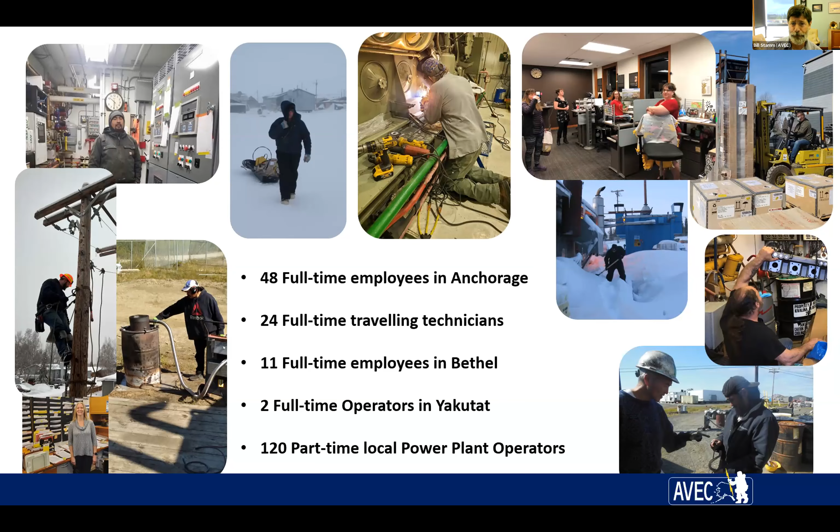Everything that we do, everything that we build, we typically have to fly in or barge in. There's not a variety of hardware stores to go out and buy more parts and pieces. There's no electric supply or electronic supply stores that you can purchase things from. So everything you do, you better make sure that you've made a list and checked it twice before you go out there to build something.

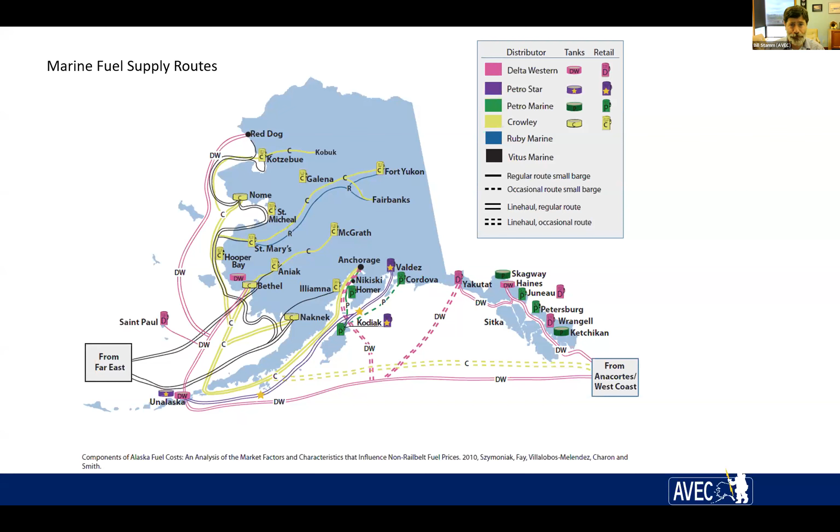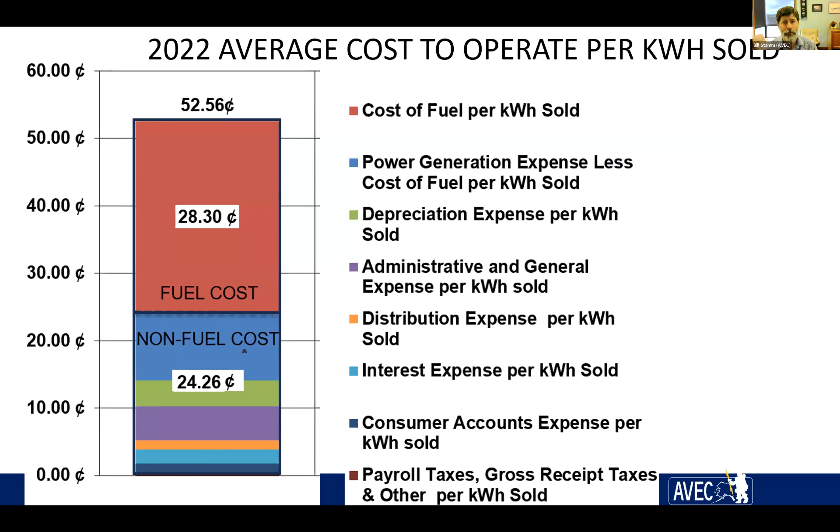In Bethel, where the economies of scale are quite a bit better, it's probably in the 30 cent per kilowatt hour range prior to PCE. But if you throw all of our costs and all of our sales into one bucket, our average cost per kilowatt hour last year was about 52 cents a kilowatt hour. As you can see, more than half of that cost is just to buy the fuel to get it into our tanks.

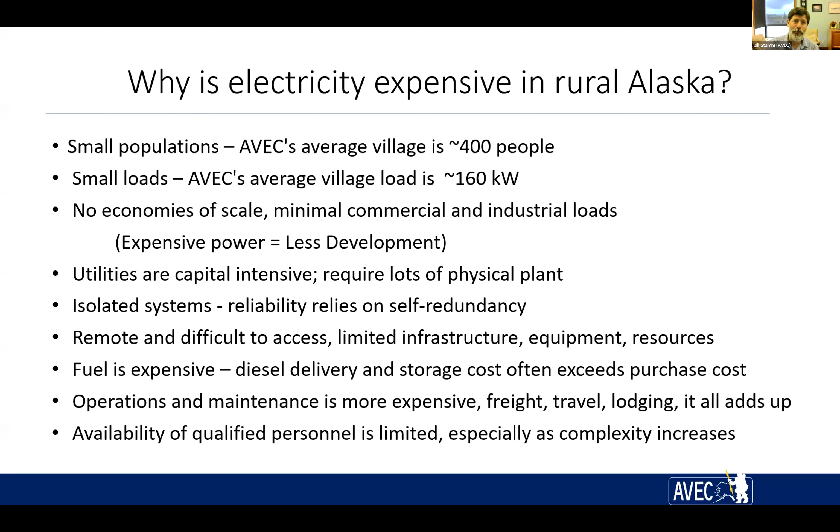And as the complexity of our systems gets more, the availability of people that will operate and maintain those systems becomes less and less. Some of the things we do to maintain or improve on that: we always take every opportunity to improve on our generation efficiency. I see I'm coming up on my half hour, so I'll buzz through this. Minimize distribution losses, try to tie communities together while we can. We welcome new facilities or new communities if they're cost effective.

There have been very difficult hardship cases where we look at it and there's no way for AVEC to have communities join the AVEC family without putting an undue burden on the communities that have been part of AVEC forever. There have been communities that have joined or that receive grant funding to upgrade facilities, and then AVEC's more than willing to take on the responsibility of continued maintenance.

But many times the facilities as they stand would require way too much work and way too much capital investment from AVEC when we still have a lot of capital investment to make in the communities that have been part of the family for a long time. We do anything we can to maximize the use of the diesel fuel. So we capture and sell recovered heat. We do have some facilities for excess wind energy that we are sending out to water and sewer facilities, and continue to promote energy education, workforce development, and economic opportunity in all of our communities.

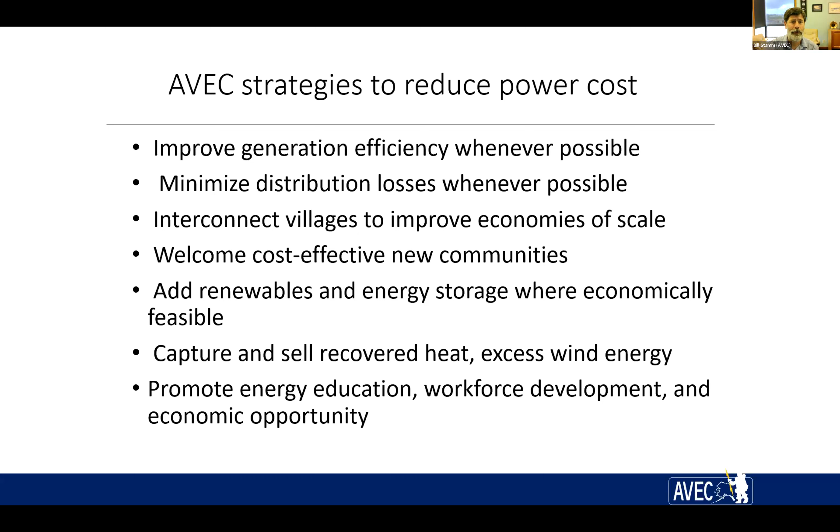Just want to highlight a project that is still yet coming to fruition. I hope I could have told you that the energy storage system was on its way, but as I mentioned earlier, that's still in Fairbanks and testing. The community of St. Mary's used to supply power as far as Pitkas Point and the St. Mary's Airport. A few years ago, we were successful in building a tie line over to Mountain Village. It's about a 20-mile tie line. And we installed a 900 kW wind turbine.

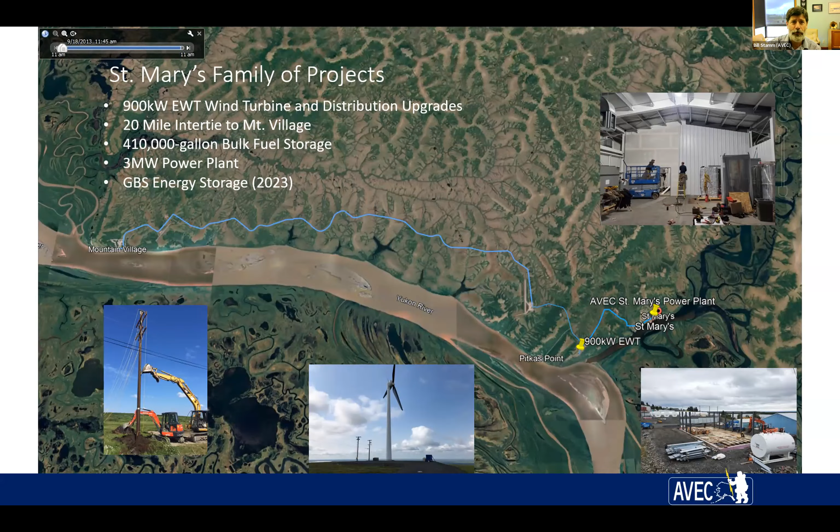In the last year, we were able to displace 35%, I think, of the diesel fuel for all of those communities with wind. It is a large 900 kW turbine that is serving an average load of about 600 kW. So there, with the energy storage, we're hopeful that we're going to be able to, one, cross the 50% threshold, and also expand the beneficial electrification that might be able to be used for excess wind. That's it. That's my presentation.

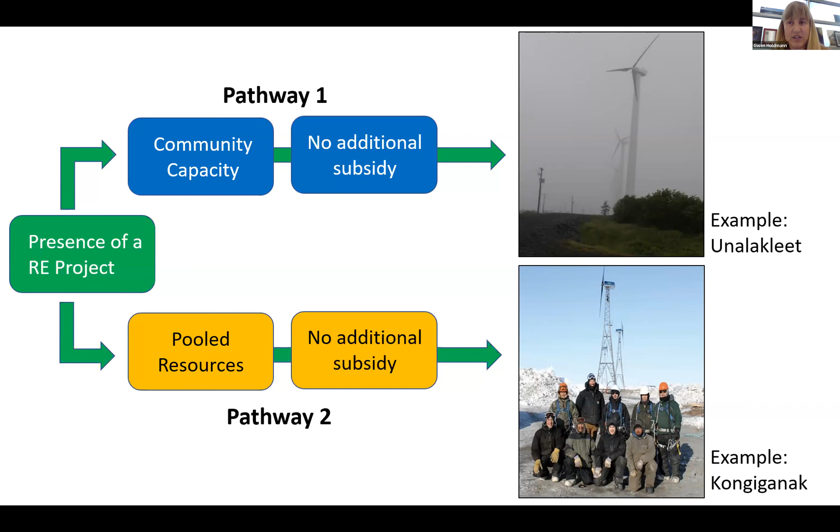So with that being said, I was really interested in AVEC because that's one of the main ways in which we're pooling resources across multiple communities, and seeing across a number of different variables how it compares to independents in the same region, taking account of variation in size and distance from the coast that would also impact, for example, fuel costs or the delivery of fuel.

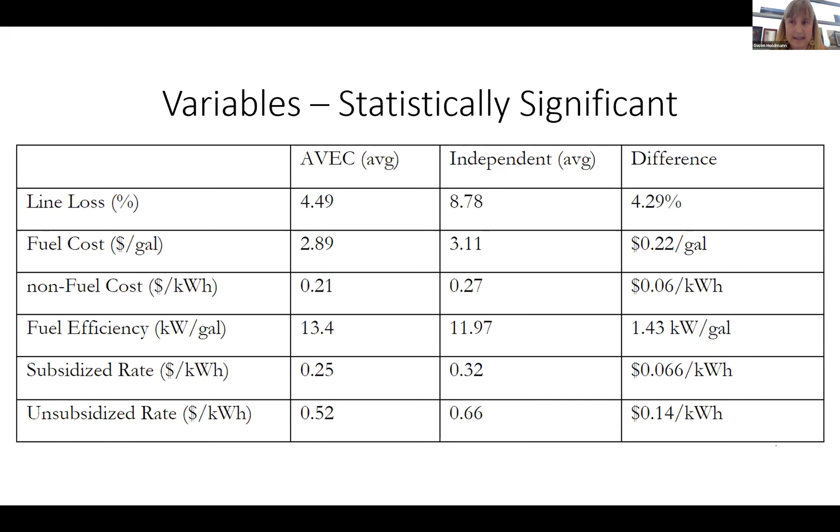And then going back to the difference between the subsidized and unsubsidized rates. Not all kilowatt hour sales qualify for the PCE program, so that unsubsidized rate difference can make a really big difference for these communities. Looking at the kilowatt hour sales across all of these communities, the AVEC communities are paying in total about $100,000. And again, these are really rough numbers, but there generally is a trend where there's quite a bit of higher efficiencies with AVEC communities, correcting for size and distance from the coast and those sorts of things. So I just wanted to point that out.

If people are interested in that, because I don't want to spend a lot of time on this, I want to pass this off to Connie and address any questions. But there's a couple of publications that are out there right now. The second one in particular, this critical pathways, is where some of the data I just shared comes from. We can drop that in the chat. They're both available for free online as publications.

And then there's these 3 publications that I'm working on right now that should be published within the next month or so. One is just a case history of AVEC. The second one is this quantitative analysis of AVEC's performance that I've been presenting on, a little bit of an advanced snapshot. And this third one is really this Goldilocks zone of size of utilities for remote communities, balancing local control, which a lot of folks really want to maintain, and that's understandable, with economies of scale across numerous different communities. So I've been trying to find where that optimal zone is for communities in terms of pooling resources versus maintaining local control. So those might be of interest.

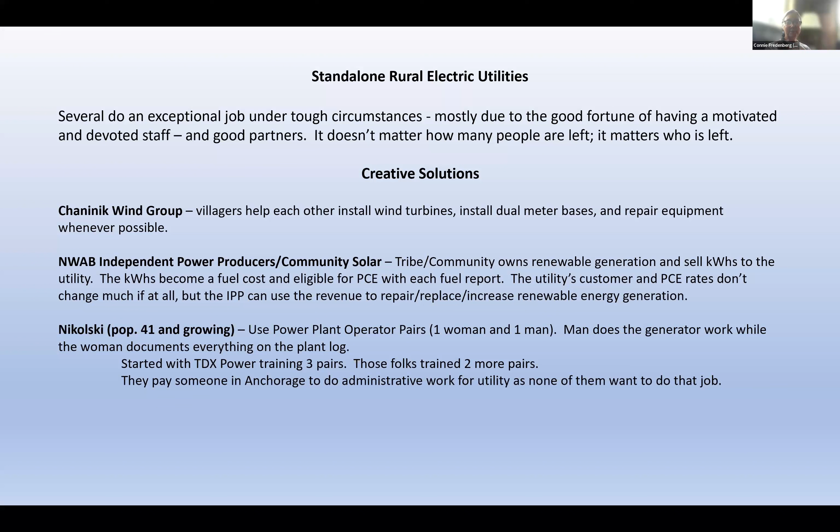And I just had to throw this in there because, like I said, the depreciation is one issue with PCE, but another one is it just directly butts heads with renewable energy. And my example is Puvurnaq Power Company in Kongiganak. According to Rod Phillip, their manager, they have reduced the amount of imported diesel fuel for that community for both heat and power by 50%.

That's huge. And when doing their annual report, I help them. They do it mostly themselves, but I help them, and I review things for them. But I asked the RCA when they reviewed the report to count those excess wind kilowatt hours when they calculate line loss, but not to count them when they calculate the PCE rate, because that causes the expenses to be divided by a larger number, which doesn't seem quite fair.

It reduces the PCE rate unfairly because they're selling that heat kilowatt hours for 10 cents. And that's just not much. Their regular rate is 65 cents. So I think it unfairly reduced their PCE rate. And on top of that, they take the revenue from the sale of those heat kilowatt hours and subtract it from expenses, further reducing the PCE rate.

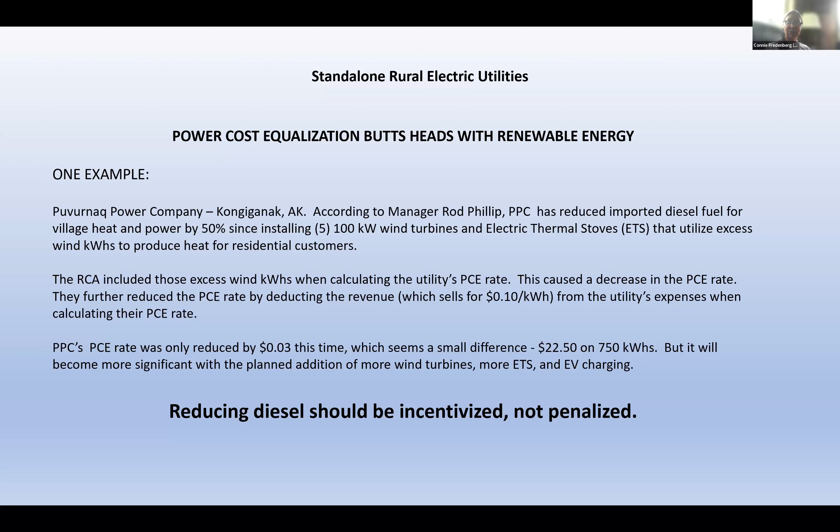Thank you, Connie. I really appreciate that. And I appreciate that point that you made about Kongiganak, and I'm sure we'll hear a little bit more from Dennis on that as well. But that $22.50 that you mentioned, that's on a monthly bill for somebody using 750 kilowatt hours, which is kind of the maximum threshold allowable for PCE right now.

But if you look at that over a year, I calculate it's like $270 a household at that threshold again. And for the community overall, I'm just doing very back of the envelope numbers, that'd be more like $40,000. So that really starts to add up and be pretty significant. And I don't think that the PCE program was really designed when we were thinking about wind to heat or some of these other really innovative approaches.

And so that idea of rethinking how it's applied, because we do want to incentivize the reduction of diesel fuel consumption for both electric power but also for heat, is something that maybe the rural subcommittee could really be looking at as part of this task force. Does that sound fair to you?

Yes. Hey, and I also wanted to point out one other thing. We were talking about community facilities. There's also a backlog of approving community facilities at AEA. And I've worked with several utilities that put in applications for community facilities years ago that have yet to be approved. And I guess AVEC's better at writing them. I'm not sure how they get all of theirs approved when we've had some serious issues with that.

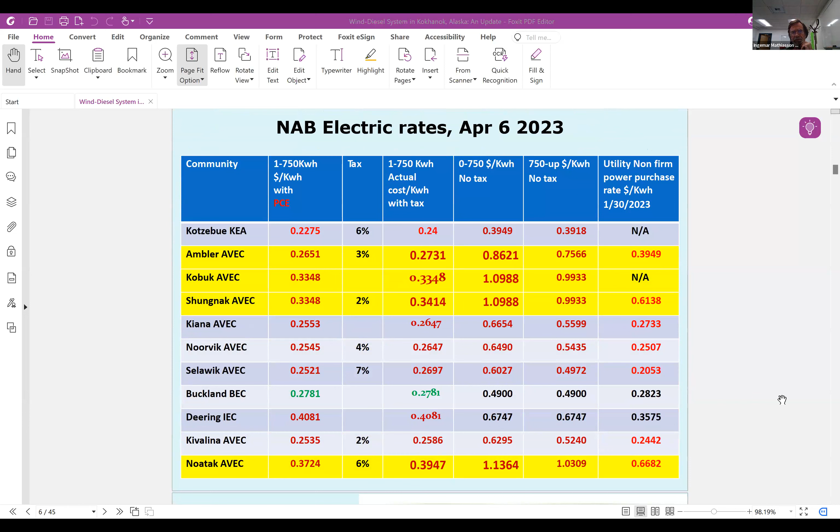I'm also including here the utility non-firm power purchase rates for a discussion further down in the slide stack for how we operate as an IPP up in the region. Next one. So we started our energy plan in 2008. You can go to the next one. And it's been running now for 15 years. And we meet two times a year to make sure that we are on track with our energy plan with all the 11 communities. Next one.

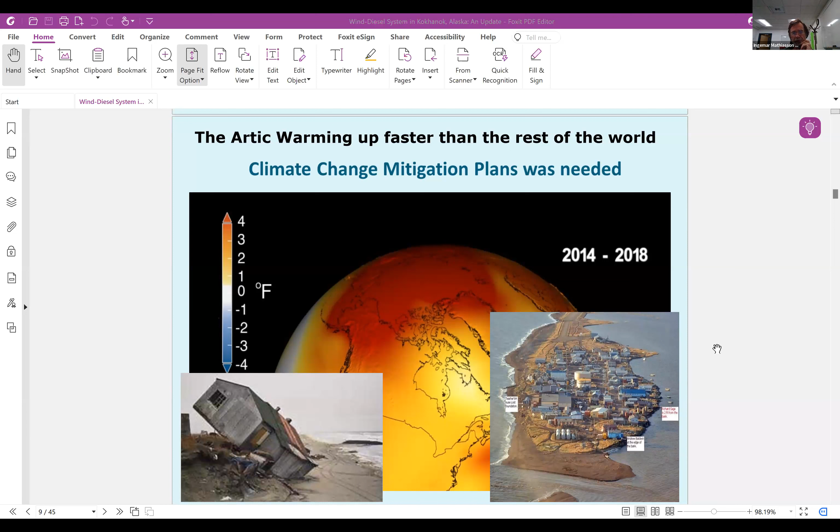In 2014 to 2018, something more was added into the picture, as you know, and that's the climate change mitigation plan, as we are now starting to erode and have other problems, including the carbon problem. Next one.

So we changed our statement just slightly, that we weren't just doing renewable resources because of replacing the diesel fuel, but also to combat climate change and the CO2 increases, methane and so on and so forth. The 10% decrease of imported fuels by 2020 actually has been changed a little bit to 2025. 25% is what we're aiming for by 2030, and maybe 50 by 2050. Next one.

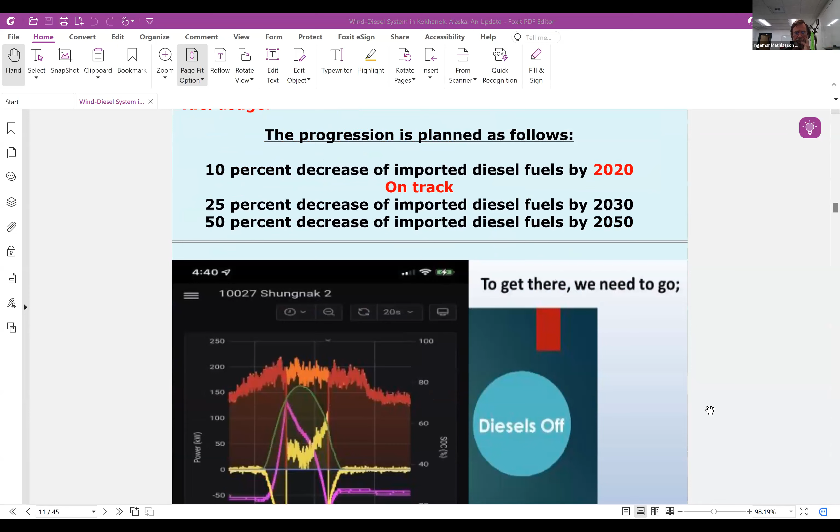And to do that, of course, we need to try to get diesel off when it comes to electricity. This is a snapshot from Shungnak diesel-off last year when we started to turn it on. Next one. So our single focus back in 2008 to 2012 was to try to stabilize the cost of electricity, developing the local resources as much as possible, wind, hydro, and possibly bring down the cost per kilowatt hour. And the projects were funded and implemented by the electric utilities to offset the use of the diesel fuel.

However, the cost to the households per kilowatt hour did not change much in the communities that receive PCE funding. The funding balances out against the Railbelt, and basically all of Alaska ends up in the same configuration, right around 20-24 cents per kilowatt hour, balancing against each other.

As you may know, it's been in the discussion, the natural gas in the Cook Inlet is changing the picture, and if the cost goes up for the Railbelt utilities, and that starts climbing to 30 cents per kilowatt hour, the rural communities will get less PCE and will climb up to the same status at 30 cents or higher. We're all balancing on that PCE formula back and forth. So what happened, of course, as we built more and more alternate energy projects, like Connie mentioned, the PCE then decreased to the communities. Next one.

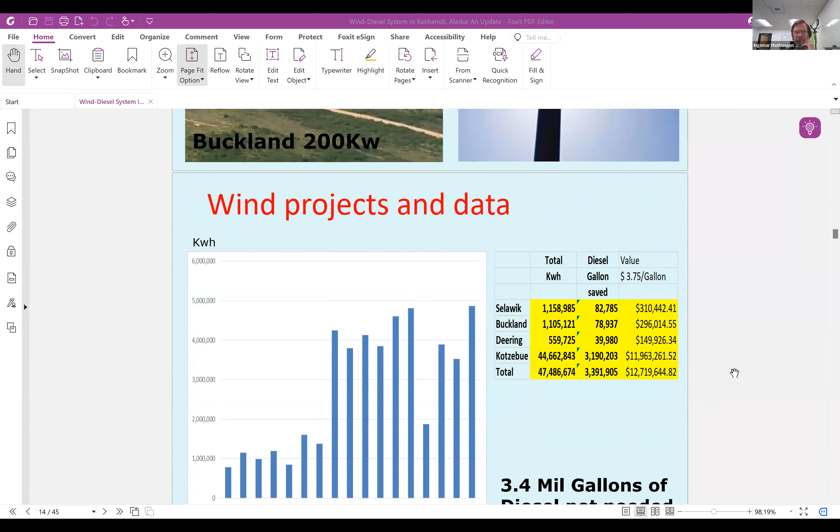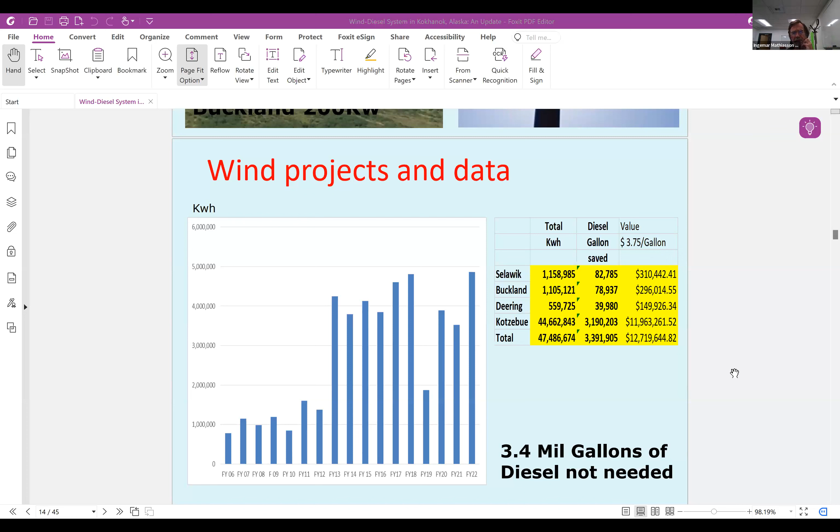The wind project has done well. The Kotzebue projects are included here, and 3.4 million gallons have not been needed over the years since it's been implemented. It has been a success, of course. Kotzebue Electric up there was one of the forerunners in the state. Next one. And the first independent power producer showed up in 2012. Very familiar, I'm sure, with Fire Island. Just making a point here that in 2012, the first independent power producer actually showed up in the state. Next one.

2012 was also the year when we implemented the first solar arrays up in our region. In 2011, we had a test panel that showed that we had 11% capacity to do it. In 2012, we got a hold of a CIAP grant, Coastal Impact Assistance Program. And with that, we convinced DC that Alaska was indeed not dark. When they asked us how we were going to do solar to clean up the environment, we said, well, we're going to decrease the amount of fuel for our plants and lower the cost of operations. And that would create fewer spills, a cleaner environment, and better conditions.

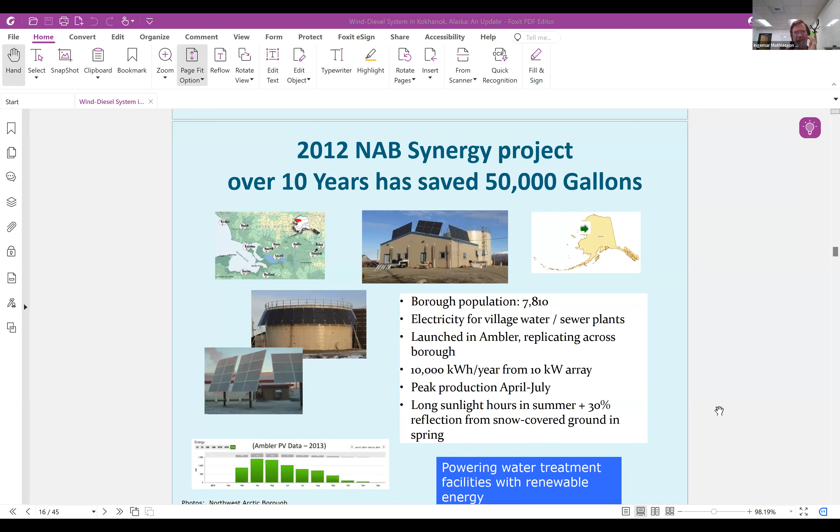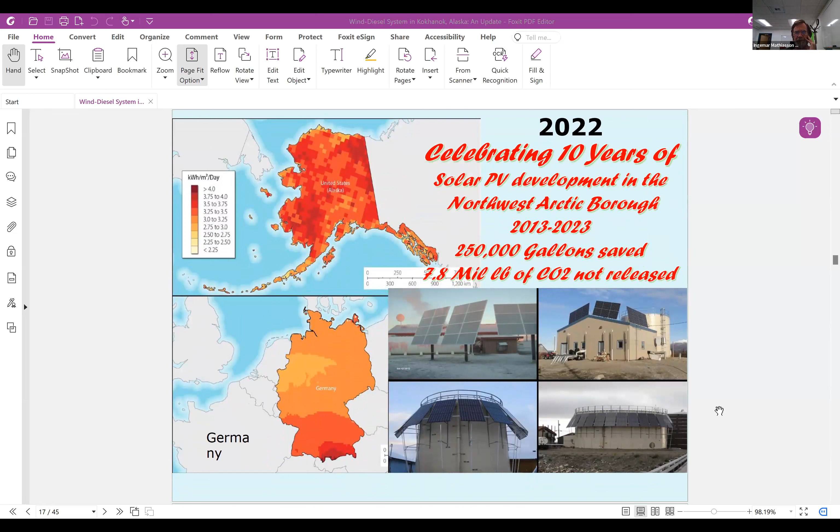And they go, well, it's dark in Alaska, isn't it? And I said, nope, it's not. And they eventually reluctantly allowed us to put all the solar arrays up. And since then, we have saved 50,000 gallons over 10 years. Next one. We have 10 years of continued solar development because of that, and 250,000 gallons now saved, 7.8 million pounds of CO2 not released. Next one.

So these are approximate minimum values per year of behind-the-meter solar projects at the water plants. These are not visible to AVEC or to any of the utilities. They are behind the meters, and their value balances exactly against what the PCE subsidized rate would have produced. And those are the numbers right there. Basically 30,000 plus in savings per year for the water plants of the region. Next one.

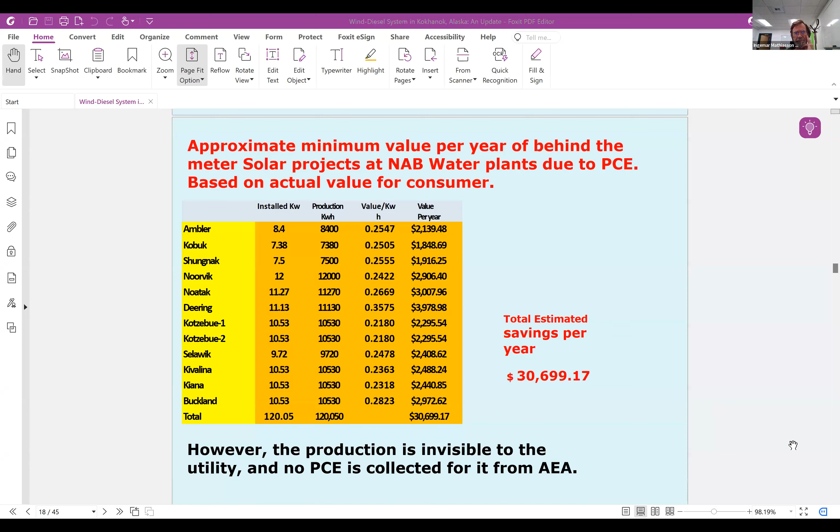So here comes the interesting one. If you look at the top one there, if the Shungnak utility project at 233 kilowatts was actually put on the households, the value would have been $51,100 per year. As an IPP, its value is 112,000. So it was actually better to implement in this utility, in this community, the solar array.

This is a value for the households, right? As the households actually own the IPP in Shungnak, they make the 112,000. If they had put the solar arrays on their houses and then behind the meter, the value would have been only 51,000, because of the difference between the avoided diesel rate and the actual PCE rate that is the result of it.

If you look at Noorvik, it's actually the other way around. In Noorvik, the avoided rate is 16 to 17 cents, and the PCE rate is higher, so it's more valuable on the households in Noorvik than it is as a utility IPP array. I'm just making a point here that this has to do with how the PCE is calculated, right?

It offsets the same amount of diesel fuel whether the solar array is behind the meter on the households or with the utility, doesn't matter. It's the same amount of diesel fuel that is offset, but the actual value to the community is different. If you look at Kotzebue's 966 kilowatt array now, with a production of 920 megawatt hours per year, behind the meter value is 220,000, and its value as an IPP would have been 165.6.

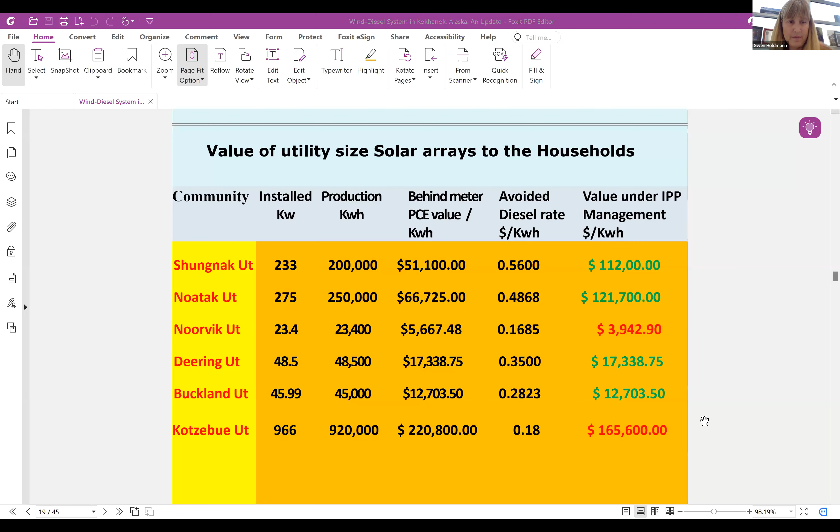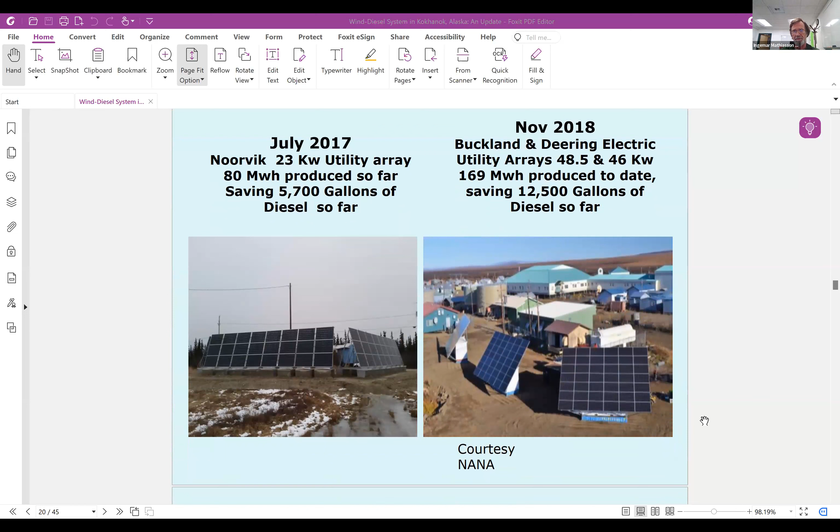Next one. So in 2017, we did a 23 kilowatt array in Noorvik, and Buckland and Deering got their first solar arrays. Next one. And in 2020, Kotzebue built their first solar array, together with the Shungnak one that was completed in 2021. And Kotzebue has now advanced theirs from 630 to 966 kilowatts this year. And the difference here is interesting.

You'll see in a minute here that on the one hand, of course, Kotzebue wants to go to diesel-off. Shungnak has operated diesel-off together with the partner AVEC, and produced 818 hours of diesel-off operation last year. There are things that we are still working out with the project, and it's not easy to just integrate it.

All the utilities need to be upgraded to microgrid status, and in many cases that takes quite a bit of money, up towards $1 million needs to be advanced to utilities that want to do renewables effectively. And that money has to come from somewhere. And it's hard to justify that in the grant requests we do to the Department of Energy or USDA or the state. Next one.

So why do we develop them? The communities can take control of their own energy future, developing the local resources. This creates buy-in and good relationship with utility, and they can sustain the PCE support to the community and stabilize the energy cost. Better economics, circular economy, funding collected pays for further development and local workforce expertise. The money stays in the community instead of sending the money to far-off countries for oil.

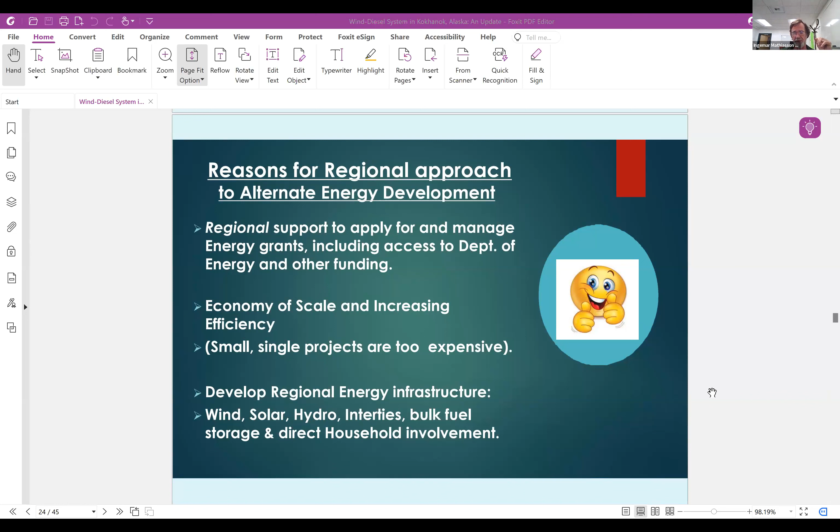So the reason for a regional approach to this. Well, regional support to apply and manage the big energy grants, including access to the Department of Energy and other funding. Economy of scale, we can increase the efficiency of making the project happen, because making a small project in a single village is more expensive. And we can then go for the regional energy infrastructure, like interties, in particular bulk fuel developments, which we are looking at right now, hydro projects and interties, and direct household involvement, which also is happening here. Next one.

The borough in this case is helping with administration for the independent power producers for PCE calculations, utility base and billing, job creation, workforce development and training, capacity building. So this is some of what boroughs should do anyway. So it fell right in our court to do some of it. And the region then speaks with one voice, can advocate on behalf of the PCE and the statewide energy policy that creates energy security. And it's needed to stop the increase in cost of energy and hedge against the fuel increases and supply disruption. So next one.

The Shungnak Solar IPP project. Okay, so Shungnak is 223 kilowatts. It uses 550 panels. Blue Planet is what we decided to go with for environmentally friendly lithium iron phosphate batteries capable of holding both the communities of Shungnak and Kobuk. They are tied together with an intertie. So they can actually run on just the battery for 2 hours during the summer without generator or solar power. So we started in April '21, and completed the construction by September '21 at a cost of 2.36 million, funded by USDA and our local VIF and rural funds at another million. Next one.

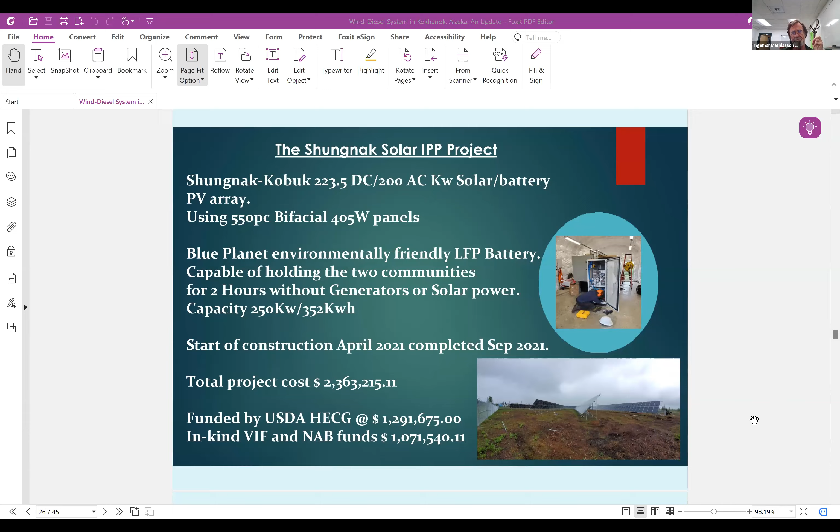And of course, we got 2 awards. We got the Project of the Year award in '21 and the Most Equitable Community Solar Array in the United States in 2022. A lot of fun. Okay, next one.

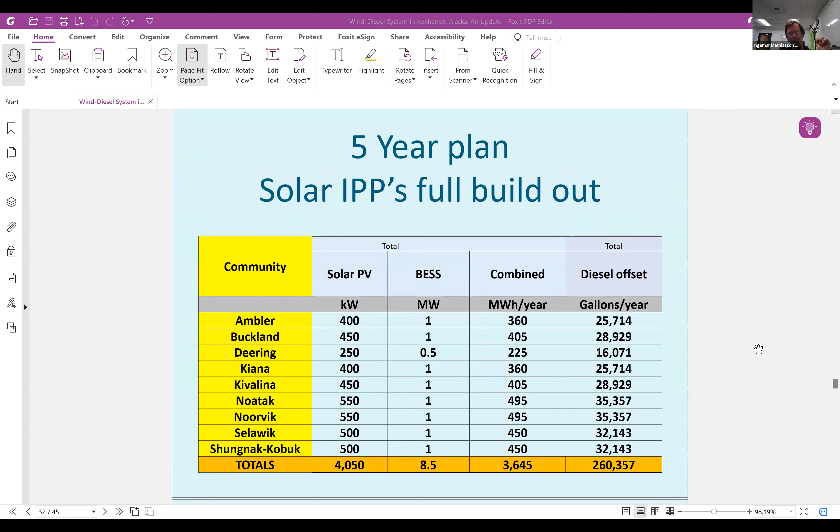So here's the build out. This is approximately what we need to get to the full build out of what we think we can put in every village without going overboard in the financial realms for maximum diesel offset per year. This is the rural communities, only the hub around Kotzebue. Kotzebue is not included here. So we can get to a point of 260,000 gallons offset per year and keep the PCE funds. The next one.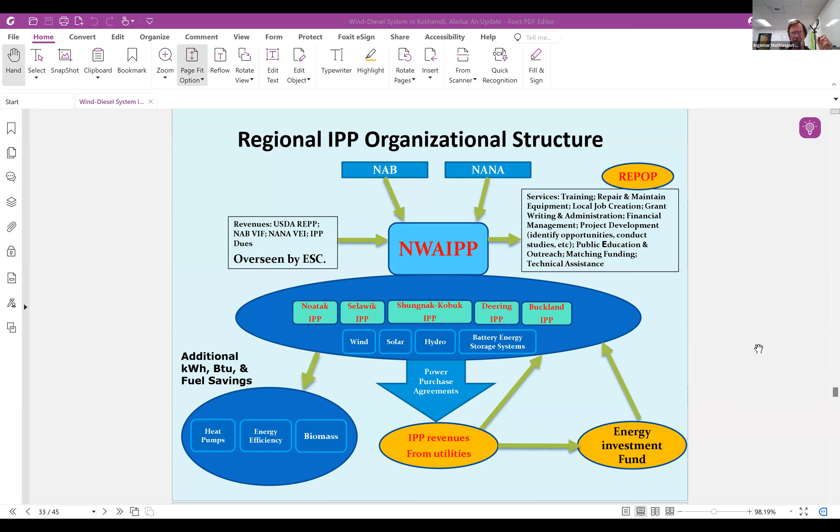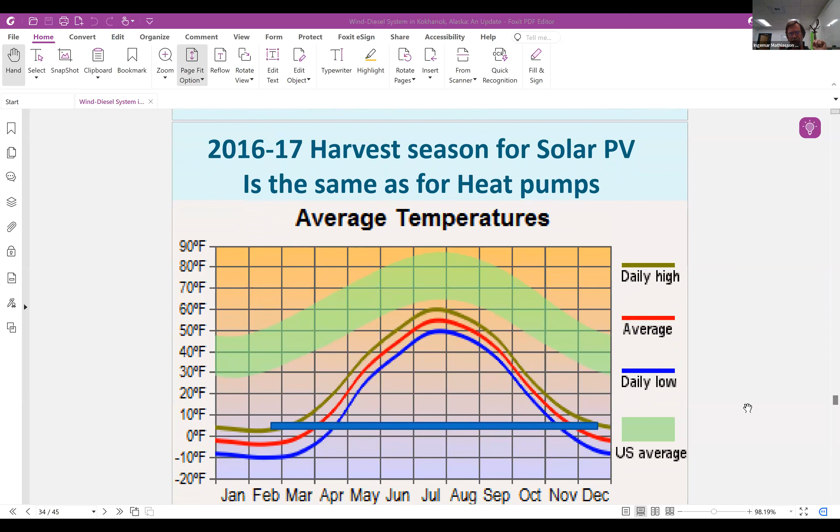We realize that as the complexity of these systems increases, we need to have faster and faster response, and to get internet fully developed in all the communities is pretty much a must to operate this microgrid system. Next one. And then I want to add on a little thing. That's the IPPs. And I just want to also add in that the solar PV has the same harvest season as heat pumps. The next one shows the same months of the year for Alaska that we have the sun, and we can also do heat pumps.

And this particular picture shows that if your COP on a heat pump... all of you probably know what a heat pump is at this point, mostly mini splits we're talking about here that can either heat or cool the house. There will be some pictures here in a bit. I wanted to just emphasize that this is the next step. After we electrify, we need to get after the heating fuel, right? And this is one way to do it with the heat pumps.

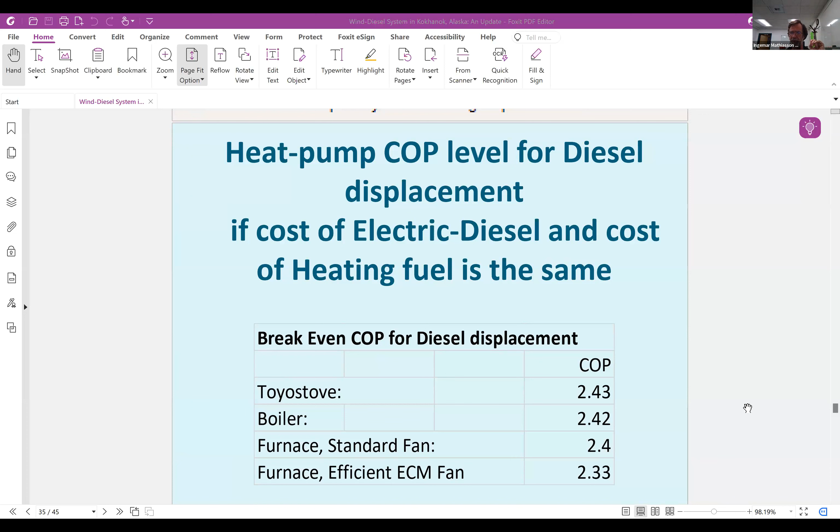Next one. This is what Maine did. This was 2017, they started this. They run heat pumps over in Maine down to -27 Fahrenheit. And we have seen some of the heat pumps in our region work well down to -40 and still function, depending on the size of it and survival. COP goes down to just 1, so it's the same as an electric heater, but they can save quite a bit. You'll see here in a minute. Next one.

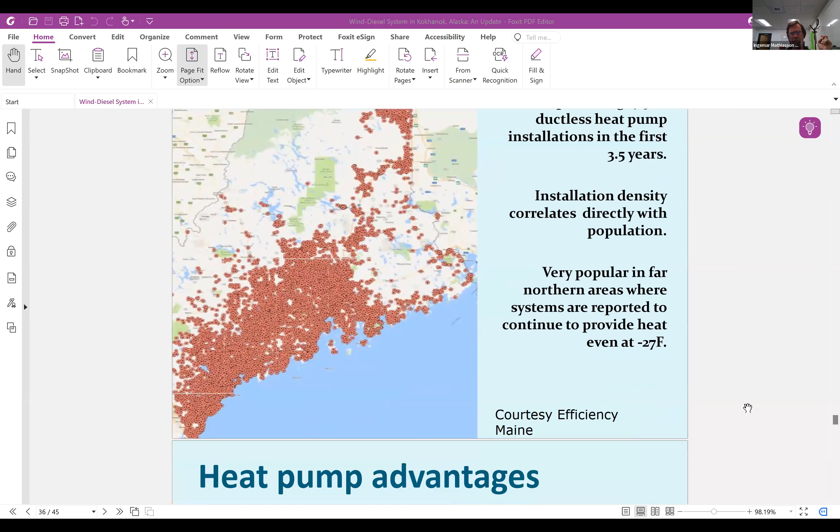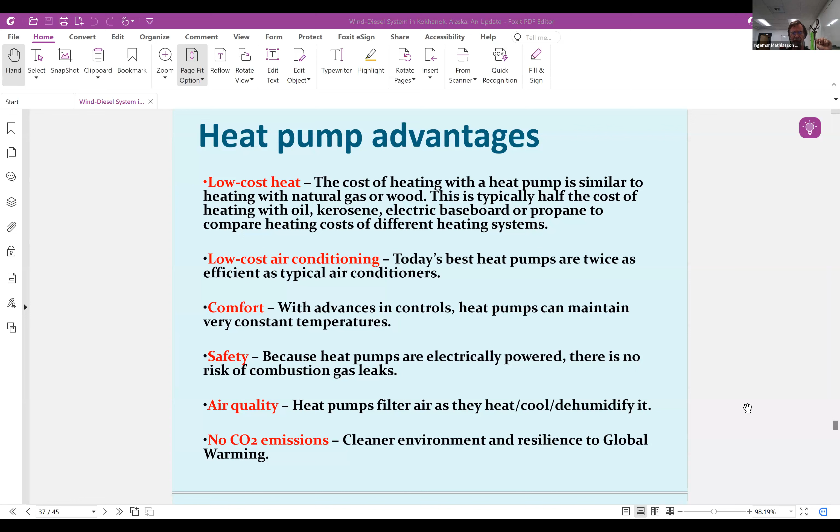The advantages are low cost heat, low cost air conditioning, comfort, safety, air quality, and no CO2 emissions, providing that you're operating off electricity from the renewable energy system, of course. If you are operating off the generators, then it would actually increase the amount of CO2 emissions, since you need more power to feed these pumps, since this is a new system that the communities didn't have before. Another way of heating or cooling the house. Next one.

We did 13 air-to-air heat pump installations in 2017 to 2018, and they are all functional at this point and doing well. They're Panasonics. They were oversized for the low temperature environment and have saved their communities a significant amount. You'll see in a bit here. Next one. I want to make sure we stick on time here real quick.

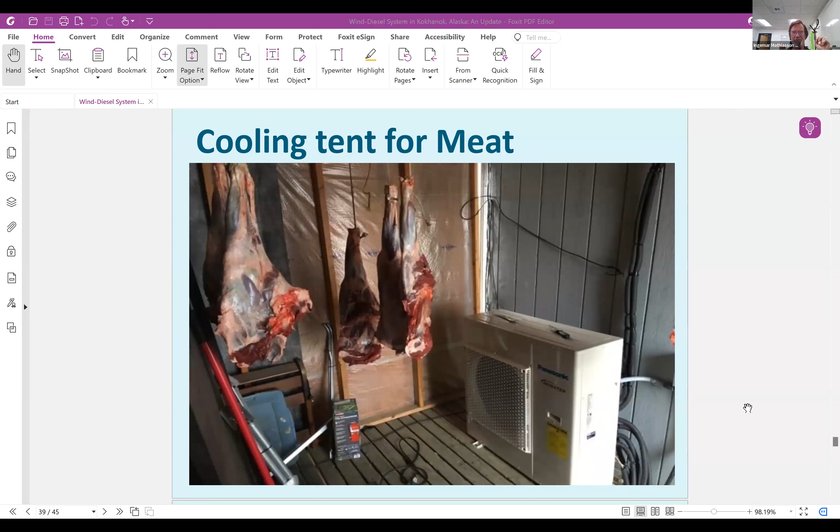One innovative approach was, one guy called me up after he got it installed, and this was in August, September. It was hot out, and he just got his meat. And he realized that if he put it in front of the heat pump, he could actually suck the heat out of the meat and put it in the house. So he ended up with a cooling tent right outside his house and saved the heat from that meat, saved the meat, and heated his house all at the same time. This picture went all around the world with Panasonic. Next one.

So here's the COP curve. You can see what months it actually is really functional, and it's the same curve as you have when the sun is up, obviously. You can see the green offsets.

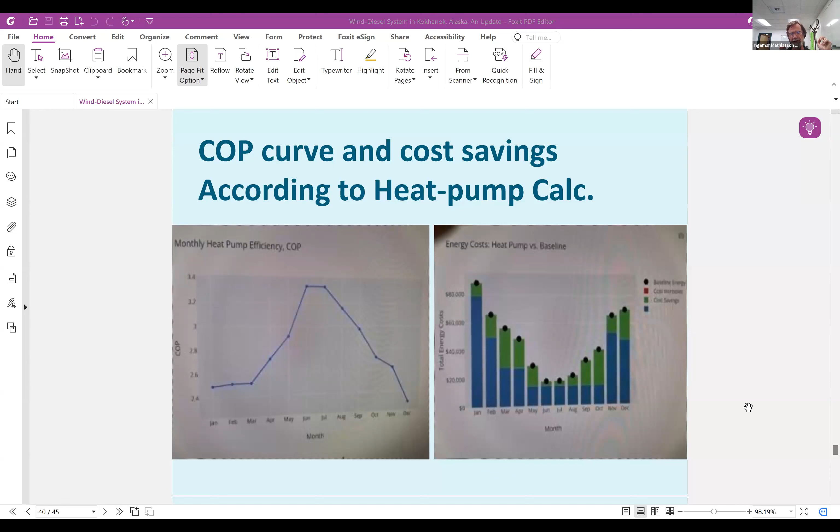That's at $12 fuel. We are now at $15 fuel in Ambler. So savings over 14 years, about $35,000. If somebody in Ambler has this unit, they're likely to save 40,000 or more over their lifespan. The heat pumps work. It's a matter of harvesting the energy when you have it.

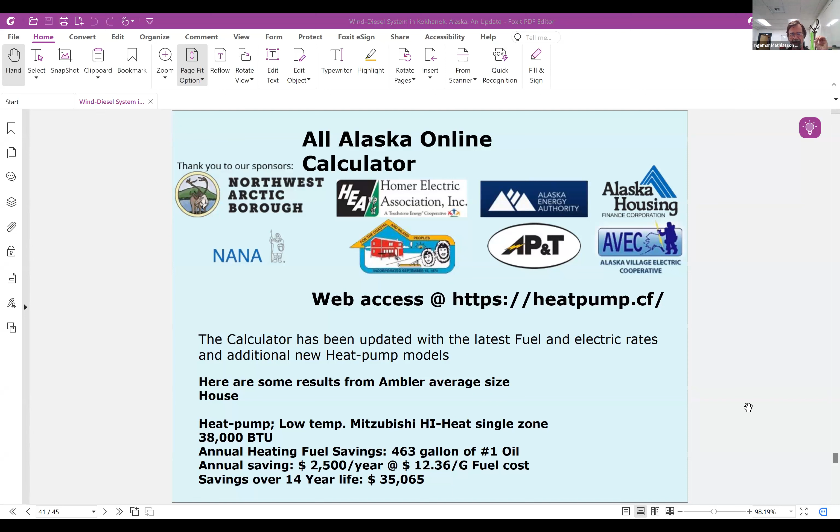In Alaska, we harvest when we have our resources, whether it's meat, fish, or whatever, and we'll harvest during the sunny season and in the summer for 6 months. There's significant savings if all households have heat pumps of various kinds. Next one.

So this is the pilot project for Ambler. We put in 65 households out of 68, completed in '21. These are actually solar powered. We put a kilowatt of solar also on the households that was not tied to the grid, tied directly to the heat pumps. And these heat pumps can function straight on solar when the sun is out in the summer and not take anything from the grid, or a combination or grid only.

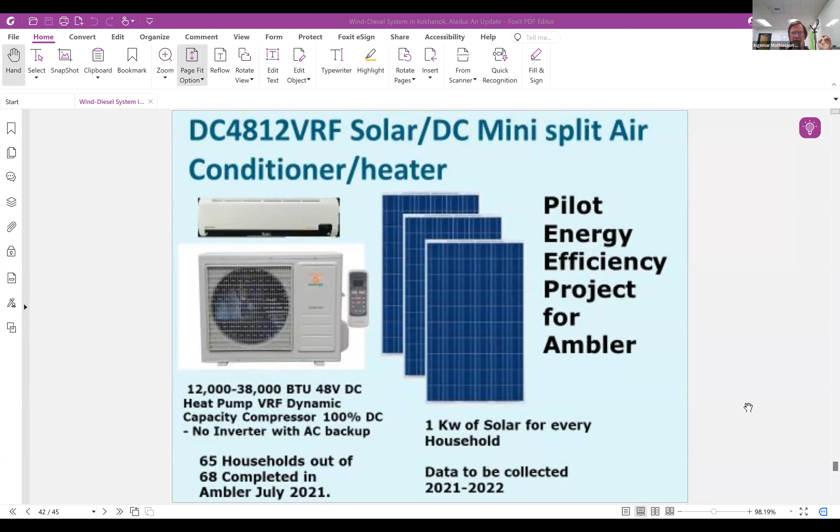So the policy is, do we develop energy resources just for short-time profit and sell them, or do we develop local energy resources that can sustain for the foreseeable future and create that cleaner environment for our children? I think that's the last one. We can go to one more there. I can take questions. Thank you.

Thank you, Ingemar. I really appreciate that. I kind of see a common theme that I think Dennis will probably continue around this idea of looking at all sorts of energy needs in our rural community and not just addressing electric power separately from heating. And I think that that's something that I've seen rural Alaska really taking a lead on, really thinking about how we approach that. And I really appreciate your time again and a lot of the things that you've been working on for quite a while, Ingemar. So thank you for sharing a lot of those approaches.

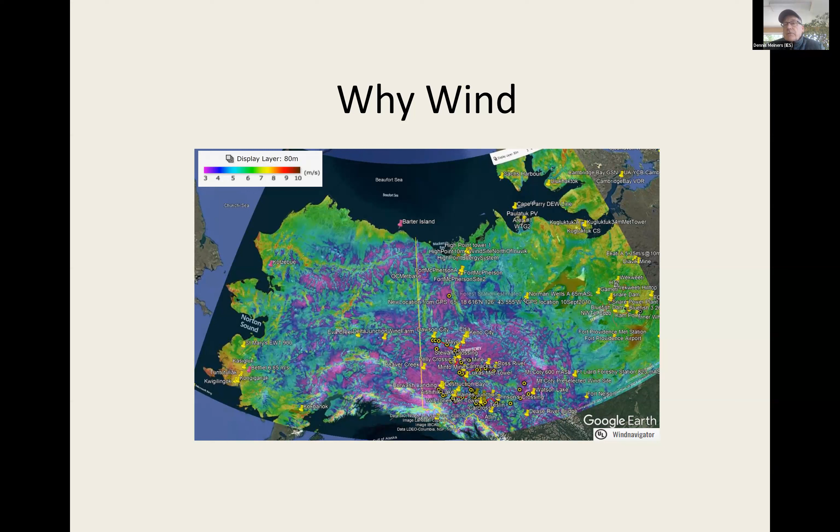So solar and wind are excellent complements. Solar can probably go everywhere. Wind can really provide the punch to provide enough energy to displace significant amounts of diesel fuel for heat, power, and transportation. Wind could probably be the major source of power for 80% of the communities in Western Alaska. Next slide.

So we kind of measured what was going on. We did a first battery project with a small battery with some funding from the Emerging Energy Technology Fund in 2015. We put in the first lithium ion battery from LG Chem. It was a very small battery. The idea was we would put in a small battery that could be rapidly charged and discharged, and a lot of wind, and we would see if we can turn the diesel engines off.

That first project was in Kwigillingok, and we ran 3,000 hours of diesel-off operation the first year. And so they had an average load of, I think, 180 kilowatts. We had five 95 kilowatt Windmatic machines, which were originally built in 1984. We upgraded them. And 135 kilowatt hours of battery energy storage. And we were able to get over 3,000 hours of diesel-off operation.

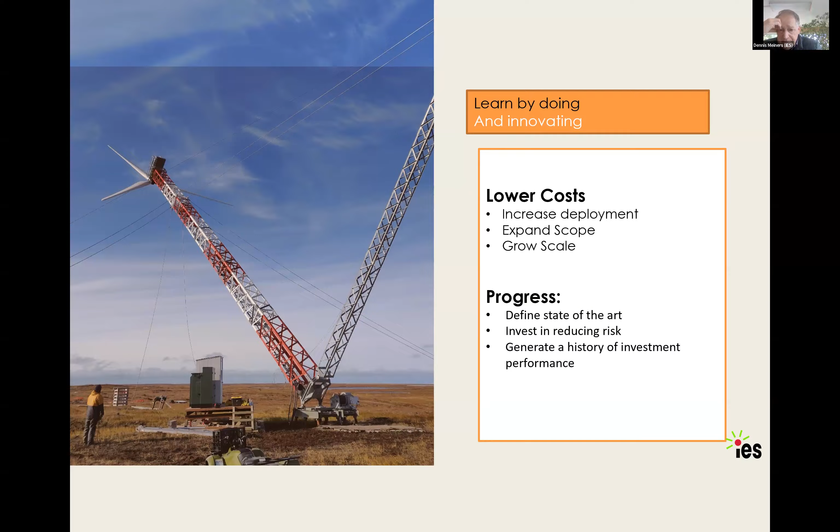So next slide. It could be my last slide. Yeah. So, there's my summary.

I guess we shouldn't always assume that we have the right answers, because we probably don't, but we have some pretty good answers. There are some levers that the state could pull right now. I would say reviewing the requirements in the Renewable Energy Fund, reprioritizing, and removing some of the barriers in the fund, like the requirement for reimbursables, where a small community, if they get a grant, has to pay for it up front, and then they can go back to the Energy Authority for reimbursement. And also, things have changed.

This whole shift toward renewables, if I look back at 2003, when we had a vision about shifting toward renewables, we were told to go talk to a therapist because we were hallucinating. And the issue now is, I think, that the world has caught up with our thinking. The opportunities have changed. There's a lot of investment coming in from the federal and state government. And we need to take advantage of that.